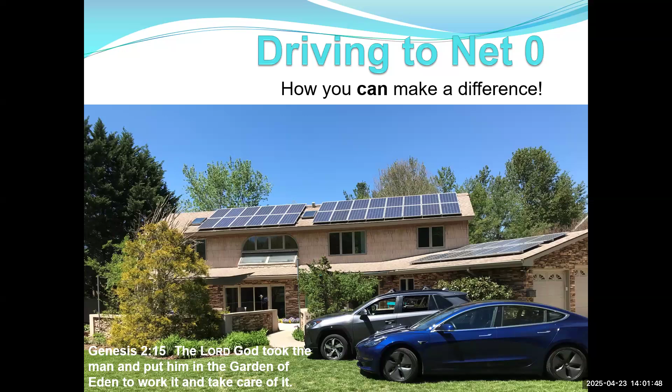My name's Dave Harivnak. I'm a PE who retired after 34 years at Eastman Chemical Company. And I've always been interested in sustainability. My first home was a passive solar earth-bermed home built into a hillside. And in 2008, when gasoline prices hit $4 a gallon for the first time, I turned my Chevy Avalanche into a plug-in hybrid, which led to a new project where I converted a Jeep for a friend into all electric drive.

And this is where I really learned about the possibility of lithium ion batteries and the power of electric drive. Our latest house is well insulated, passive solar, and we've got rooftop solar that powers not only the house, but the cars as well.

I was a scout leader for more than 20 years as my children were growing up. And for the past 14 years, I've been a mentor with the FIRST Robotics program. And so proud of the team this year that won a regional, finished second in a second regional, and went to Worlds and even competed in the finals.

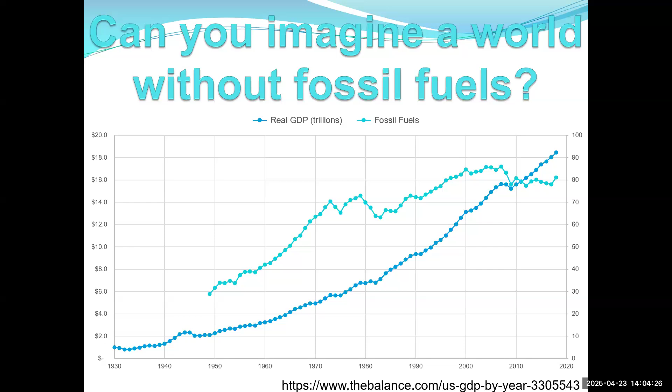You know, serf, cook me dinner. Serf, get me a warm bath. Serf, take me to work. Bring me home. And of course, we aren't using people for that, but we're using fossil fuels to multiply all of our efforts and to make our lives far more comfortable. And when you think about it, if you're a middle-class American, you're probably living a lifestyle that kings and queens could only dream about just 200 years ago.

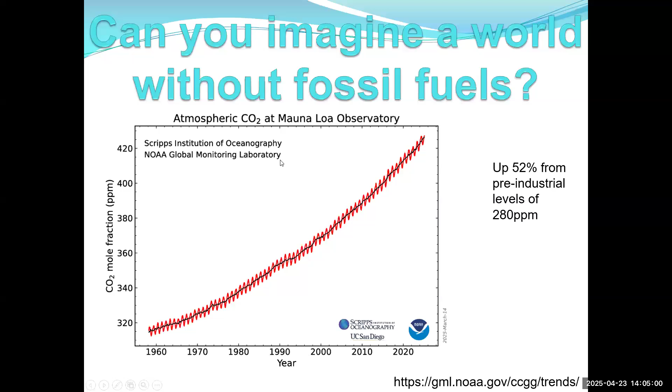But as we look throughout the world, there's no such thing as a wealthy, rich, well-to-do country that uses a low amount of energy. We all use energy. But we've also come to find that that use of energy is causing a problem, as burning all that carbon that's been stored buried inside the earth is causing CO2 to rise, and that CO2 is trapping heat absorbing gases, causing our planet to warm and causing storms to be more challenging.

So scientists have said we need to reduce emissions at least 80% to avoid the worst effects of climate change. And some of them are now on record for saying we have to cut 100%. So if we could take a little poll here or put into the chat, how many of you envision a life like this if we had to live without fossil fuels?

Hello? Just put into the chat if this is how you envision a world without fossil fuels. Okay, good. All right.

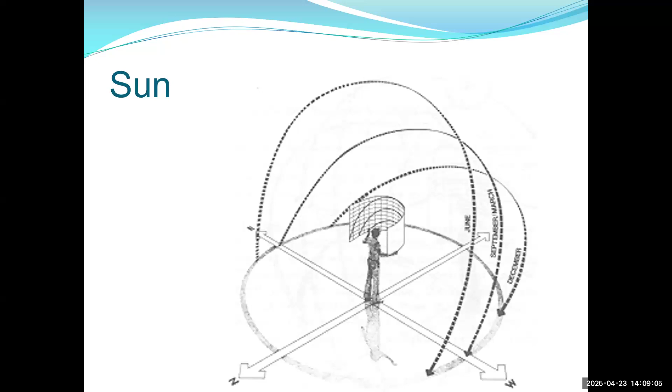lower in the horizon. And so I used this as I designed my house so that most of the windows are on the south side and the overhangs are such that the winter sun can penetrate deeply into the home, but the summer sun is basically shaded by the overhangs so that my windows are basically shaded all summer long.

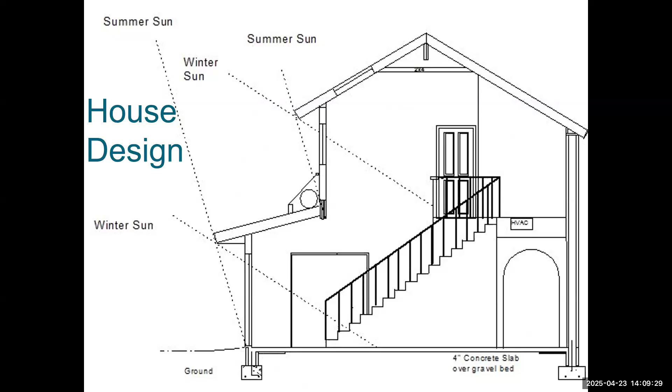And I also did this from a top view of the house as well, with the layout of the house and the garage, so that in the summertime when the sun rises, my patio's in the shade, and likewise late in the evening when the sun's behind the house, our patio is in the shade. But in the wintertime, from sunrise to sunset, we're in the sun.

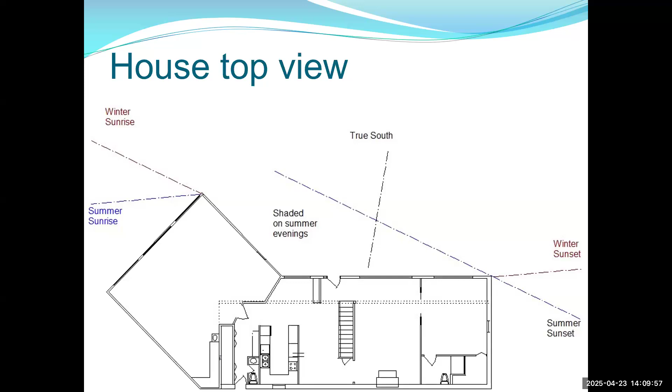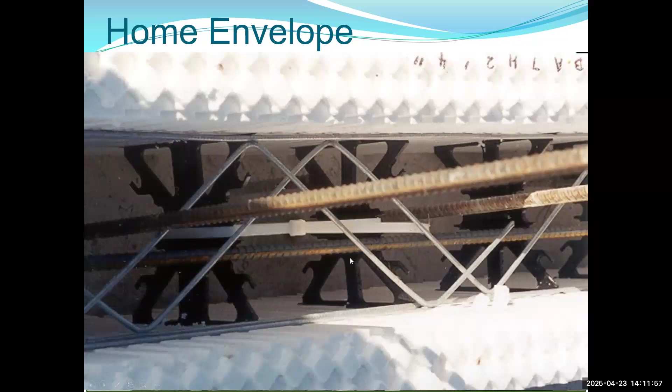I tried to build a very energy efficient envelope using insulated concrete forms. These are almost like big Lego blocks that are 4 foot wide, 16 inches tall, and a foot thick. And they actually have nubs on the top and on the bottom so that they snap together very similar to Legos. And then as you're building the wall, you throw in horizontal and vertical rebar. And then once you get that wall completed, you fill that wall with solid concrete.

Basically, this makes for a very well-insulated wall, about an R40 if you're comparing it to a wood and fiberglass insulation wall, and very airtight. Virtually no air is going to be leaking around through the concrete and through that styrofoam.

For a roofing system, we used structural insulated panels, sometimes called SIPs. Imagine a sheet of plywood that's 4 foot wide and 15 foot long, laminated to 8 inches of styrofoam, laminated to another sheet of plywood that is 4 foot wide and 15 foot long. And this again makes for a very well insulated roof with no air gaps or air leakage.

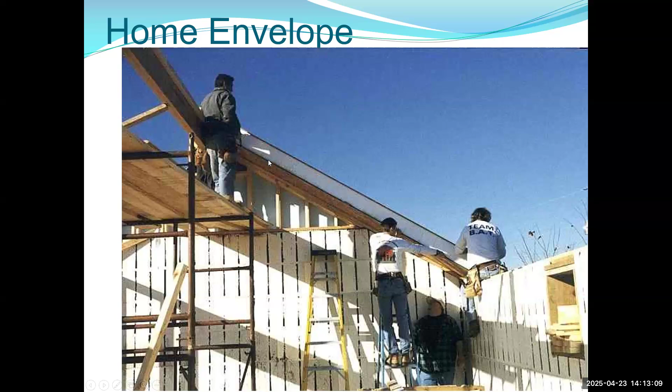And to give you an idea of what this really looks like, on a winter day when we had some light snow and temperatures were right around freezing, as you can see, the roof surface is very uniform. You don't see any of that snow melting off. But my poor neighbor across the street, you can see a lot of bare areas on his roof where the heat from the house is escaping up and melting the snow off the roof. And anytime you see holes on your roof like that, you're basically sending money out through the roof of your house.

So as a good engineer, I tried to do an analysis comparing our house to other houses and found out that our energy savings were about 60% compared to friends' and neighbors' homes. So the home was doing a good job. So imagine, to my dismay, back in 2009, when I actually sat down and calculated my own personal carbon footprint, I wasn't below average. I wasn't even average. We were actually above average, with our family emitting about 22 tons a year.

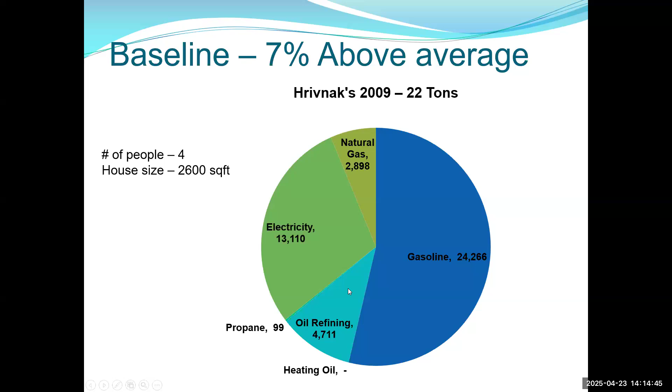And when I did a pie analysis of that, I found out our biggest offender was our gasoline use. So the first thing I did was dig into electric vehicles. And here you can see the 22 tons of emissions that we were putting out each and every year back in the early 2000s. For transportation, back in 2009, we were driving about 25,000 miles a year.

The Chevy Avalanche, which is kind of similar to like a Chevy Silverado, a Ford F-250 crew cab, was getting 16.4 miles per gallon. We used that for all the trips for the family and for scouts. And that was responsible for about 10 tons of emissions, with another 4.5 tons from the slightly more efficient Geo Prizm, kind of like a Chevy Nova or a Toyota Corolla, that back in the day was getting 28.5 miles a gallon.

And when I sat down and figured out the fuel costs, we were spending about $3,600 a year to keep those cars running. And I truly believe electric cars are significantly better. The first EV I ended up getting was a used Tesla Roadster. I got it in 2010, telling my wife that it was the most energy efficient car I was able to find.

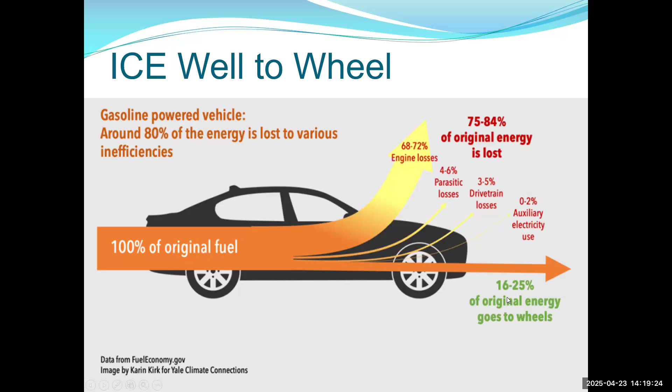And the reason why electric vehicles are so much more efficient: when you look at a gasoline-powered car, about 80% of that energy in the gasoline in the tank is lost. Most of that to heat losses out the exhaust, through the radiator, through the engine. You've got some parasitic and drivetrain losses, but only about 20% of that energy in the tank actually goes to moving your car forward, where an EV turns that on its end, where over 80% of that energy in the battery goes to moving the car forward. And you also have this nice energy recapture from regenerative braking. And I'll talk about that in a little bit longer.

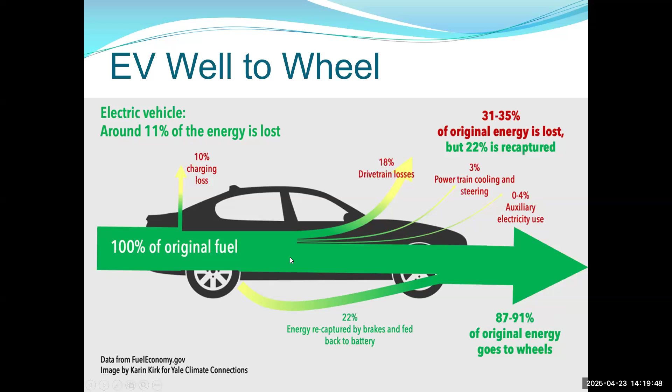I truly believe electric vehicles are cheaper in the long term, as they have far fewer moving parts. That Roadster has only 17 moving parts in the entire drivetrain. There's no exhaust or catalytic converter. Brakes last longer due to regeneration. Basically, you take your foot off the accelerator and your motor turns into a generator, slowing your car down and putting additional charge into your battery.

Around here, one of our highest mountains, Roan Mountain, I can be at the top of Roan Mountain and I can add basically about 17 miles and never touch the friction brakes coming down that mountain. And there's not a gas car around that's going to add, let's say, a half gallon of gas on your way down a mountain. Again, there's no oil changes, no pressurized cooling, no transmission.

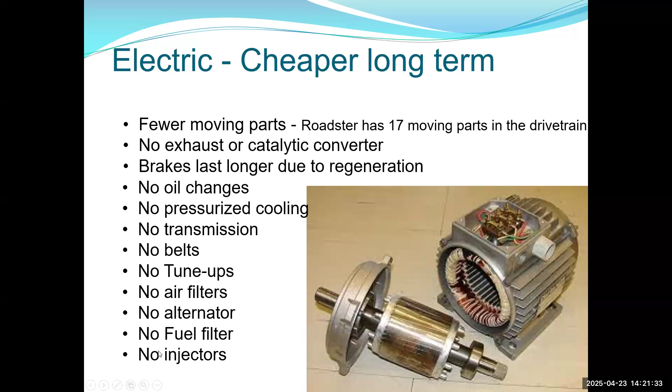There's no transmission. Basically, the vast majority of EVs are a single speed car, and even reverse, they just reverse the electric field. So you don't need any gearing to go in reverse. There's no belts, no tune-ups, no air filters, alternators, fuel filters, or injectors. And so I have found, after 15 years of driving an EV now, that they truly are lower cost to maintain.

So by just changing our transportation, we were able to drop our emissions from 7% above average to 40% below average. We're actually driving more miles right now, but we're emitting far less emissions. Tesla Model 3 is rated at 128 miles a gallon, and that's our main trip car. And we got a RAV4 Prime, which is a plug-in hybrid that I'll talk on here in just a minute. Oh, and the nice thing after going through this, we're saving about $2,550 in fuel savings. Yes, we still have to pay for electricity, but electricity is far cheaper for us than buying gasoline.

The Toyota RAV4 Prime, quote, the wife's car, is fully electric for about 42 miles. And then after 40 miles, it'll switch into hybrid mode, as I call it, as it's got a range extending gas motor. And the main reason we have this is our one big emission that I haven't figured out to completely eliminate is we love camping and touring, especially national parks and national forests here in the United States and Canada. And here we are out in Idaho in a national forest in the Sawtooth Mountains. And most of the national parks and national forests don't have any electricity. So having that ability to use gas gives us that freedom.

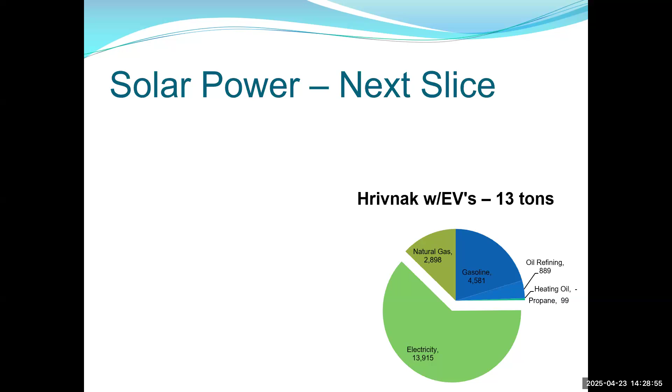But anyways, now with the electric vehicles, we're down to 13 tons of emissions. I redid my personal pie chart, and now you see electricity is the biggest opportunity for improvement. So I decided to look into solar.

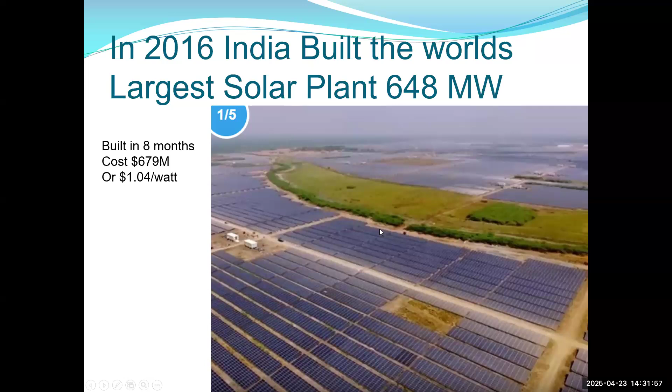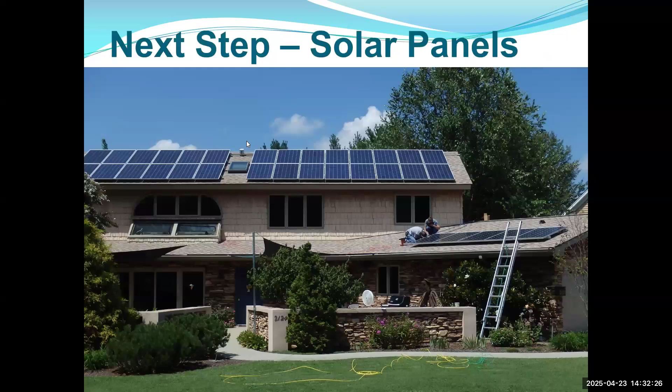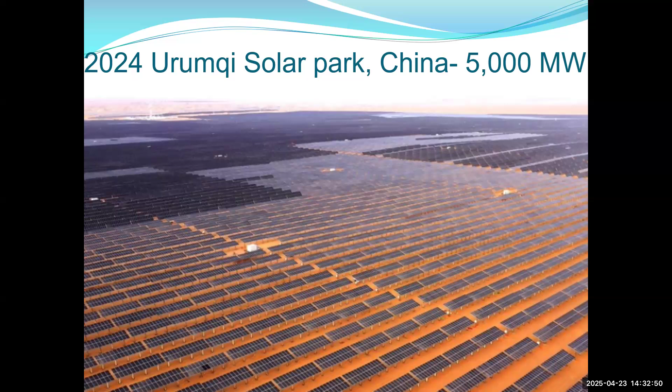Then in 2018-19, India built a 2 gigawatt solar system, which was broken again in India in 2021 with a 2.2 gigawatt system. And now last year, China just unleashed a 5,000 megawatt solar park in the deserts of China.

So we added solar to our house. As somebody noted, we put the solar in some 12 years ago. And 12 years ago, solar was just getting started, and Tennessee had virtually no codes that applied to solar. So if we were putting the solar in today, we'd have to go with smaller panels or put them in landscape mode, because we couldn't go all the way to the roof peak here. We've got to leave 18 inches now, and we've got to leave a full 3-foot walkway on the side.

We are grid tied. Our local utility allows net metering. So basically, on a nice sunny day like we're having right now, our meter's essentially running backwards, and we're putting power onto the grid that we get to use later on. Again, this is an older system. Today, if this was being put in, we would have 1 inverter rather than 2. I've got a 3 kilowatt and a 4 kilowatt inverter.

And then because I've got 2 inverters, we have to come together into a combiner box before we go into our electric panel. So on a newer system, we would probably replace this with a single 7.6 kilowatt inverter, and then we could get away without the combiner box as well.

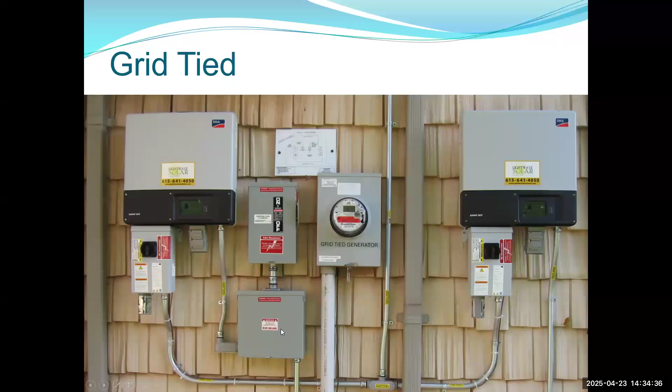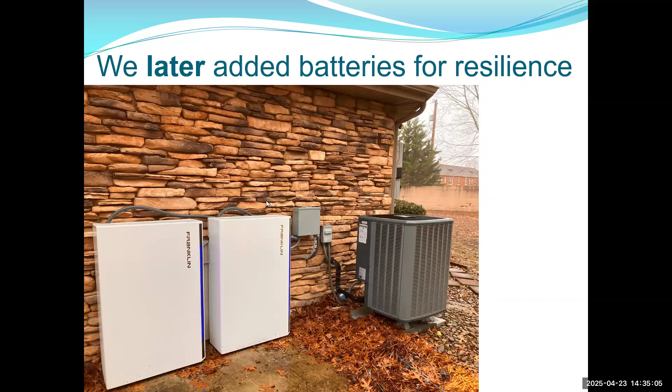We did later add batteries. Basically, I am selling and installing solar systems, or mostly doing the engineering for the solar systems. And so I really wanted to have some practical experience with batteries, which came in handy during Hurricane Helene, where my son never even noticed we lost power, and the house just kept on trucking.

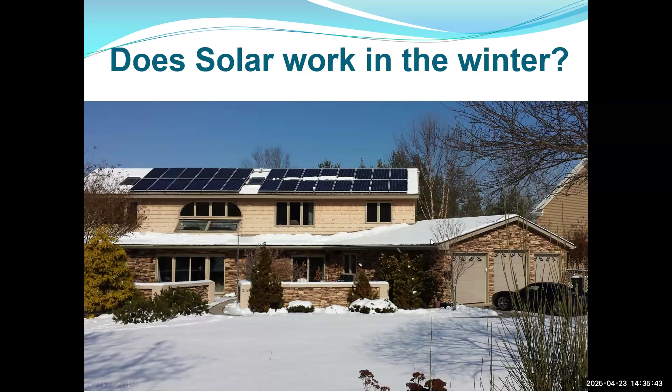People ask if solar works in the wintertime, and the short answer is yes. You do have less generation, mainly due to the lower sun angle, or shorter days. But even when it snows, because of the dark surface and the sloped surface, the last place snow will lay is on a solar panel, and it's the first place it's going to melt off of. Oh, and for this picture here, I hadn't added the garage panels. That was a little bit later of an expansion.

As I said, personally, we use more electricity in the winter than we do in the spring and fall. And we have a little bit of a summertime peak here with air conditioning, but I will build somewhere between 1,500 and 2,200 kilowatt hours of credits during the spring, fall, and summer. And then I can use that to cover the shortfall and power me through the winter.

Let's see, it looks like I got a question here.

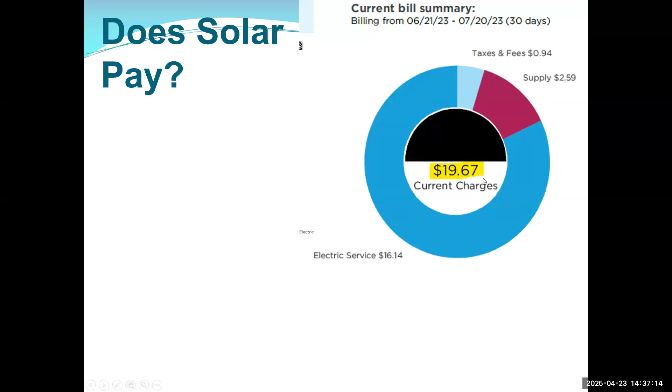But here's a picture of my electric bill when people ask me, does solar pay? Yes, I did pay 21,000. So that's not an insignificant price to pay for solar. And that is with a tax credit, fortunately. It would have been about 30,000 without the tax credit. But as you zoom in, our electric bill, for the most part, is a very consistent $20 a month.

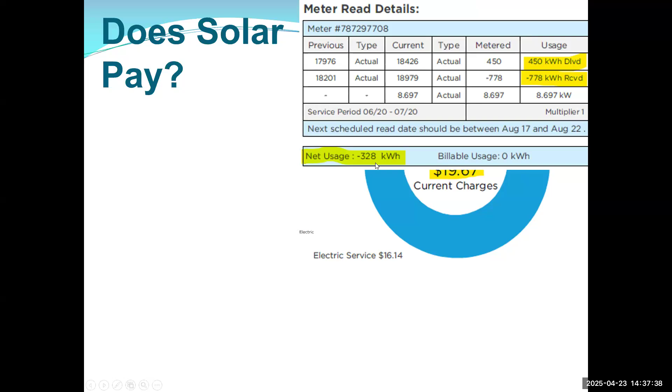And if you look into the detail that the power company gives me, like for this particular month, I used 450 kilowatt hours of energy from the grid, but I gave the grid 778. So for a net usage of negative 328 kilowatt hours that month that I sent to them. And if you look at my history, I used 0 in July, 0 in June, and 0 the previous year. And the total usage for the past 12 months was 0.

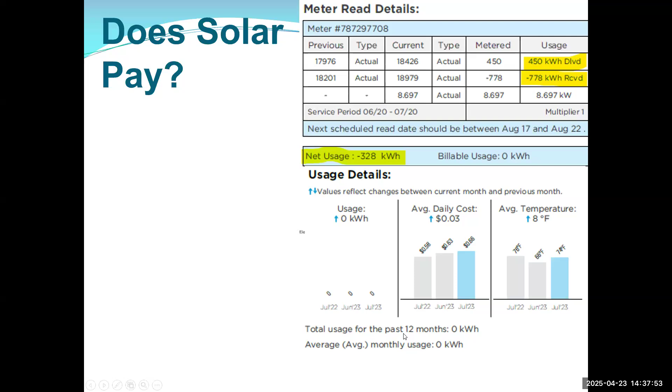As a matter of fact, there's been several years where we've generated more power than we've used. And that basically just ends up being a donation to the power company. And remember, that includes about 1,400 miles of driving in our EVs each month. So again, solar wasn't free, but how much do you pay for your electric bill and 4 tanks of gas?

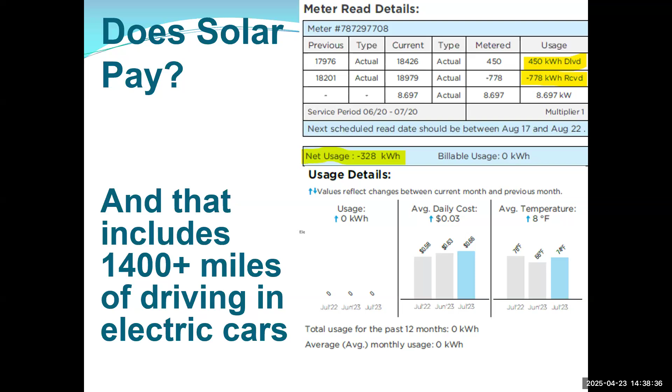And for us, it was about year 7 is when we broke even. And then we were able to now have 5 years of basically no cost power and energy. So with solar production, we've now gone from 7 or 8% above average to 70% below average, and another 6 tons of emissions were eliminated. All of a sudden, I began to realize that that 80% goal we were trying to achieve was not only achievable, but in many ways desirable.

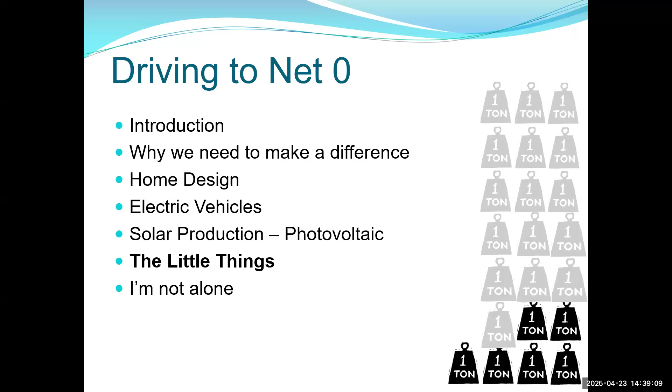So let's not forget about the many little things that we did over the years as well. When it comes to appliances, we used Energy Star appliances. They may cost a little bit more up front, but I'm looking at the long-term cost: not only the cost of that appliance, but how much energy it'll use. This is a handy little meter if you want to measure your own usage. It's a Kill A Watt meter, and you can plug it in to see how much energy your TV's using, lights are using.

A couple years ago, my wife got some LED Christmas lights, and I plugged in a string of our old Christmas lights, and it was 58 watts. The LED bulbs were 7 watts. It's kind of like, okay, let's get rid of all those old Christmas lights. And of course, there's been an incredible revolution in LED lighting.

Again, trying to get to that total cost of ownership, which bulb is the cheapest? Yes, an incandescent bulb is typically cheaper than a compact fluorescent or an LED light bulb. But when you realize that LED bulb typically would last far longer than an incandescent, and more importantly, that LED bulb at about 7.5 watts of power versus 60 watts in the incandescent, if you figure out the electricity cost to run it, you all of a sudden see that cheap incandescent light bulb is actually quite expensive.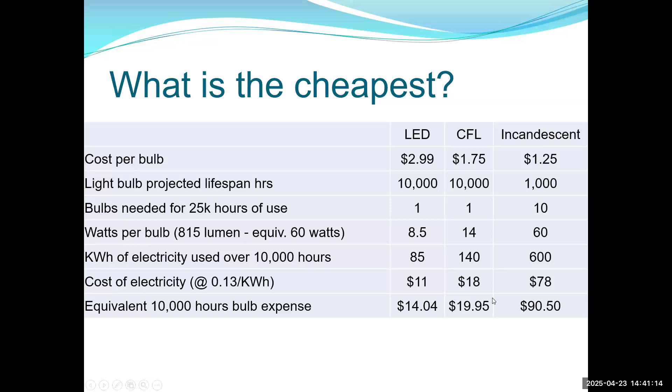And here's another use of lighting. Let's assume that the average house has got about 30 light bulbs, and they're on about 4 hours a day. By swapping out to an LED, you'd save 51 watts each. So that would be about 184 kilowatt hours a month. That would save you about $24 if you have average power rates, or that's enough power savings to drive an EV 612 miles. No panel upgrades, no electrical upgrades, basically just changing out your light bulbs, and then you're able to partially power a second car for many households. Another neat thing we found is a heat pump water heater.

It's a standard water heater from here on down, and then it's got a little heat pump that sits on top. They're about double the price of a regular electric water heater, so figure on spending about $800 more. Fortunately, there is an energy tax credit that takes some of that bite out. But what drove me to it is the annual energy costs are 1/4 that of an electric water heater.

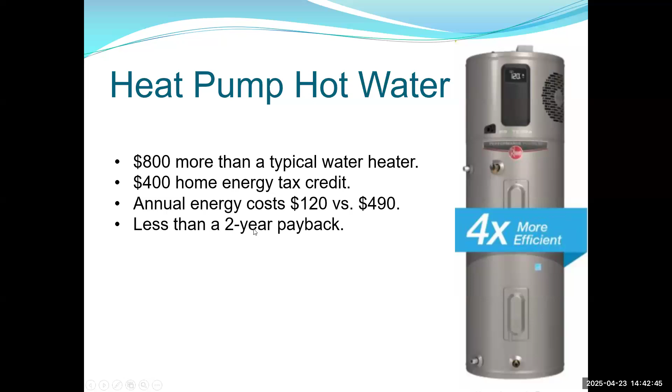So in our particular case, after some 19 or 20 years of use, we replaced our water heater. I was figuring on a 2-year payback to cover that cost of the water heater. And again, that's enough power to drive an EV some 10,000 miles a year. So that could be your main car all of a sudden, barring a few trips.

We also upgraded virtually all of our yard tools. We got a battery-powered lawnmower, battery-powered blower, battery-powered chainsaw, and weed eater. And now we don't have to worry about putting stabilizer in the gas and having to get them tuned up every spring. So overall, we've now managed to go from about 7% above average to 81% below average.

Over 18 tons of CO2 are being averted by us each and every year, and we're saving around $3,400 a year in gasoline and electricity savings. And so not only did we find out that 80% was possible, we started to realize that in many ways, it's a better lifestyle.

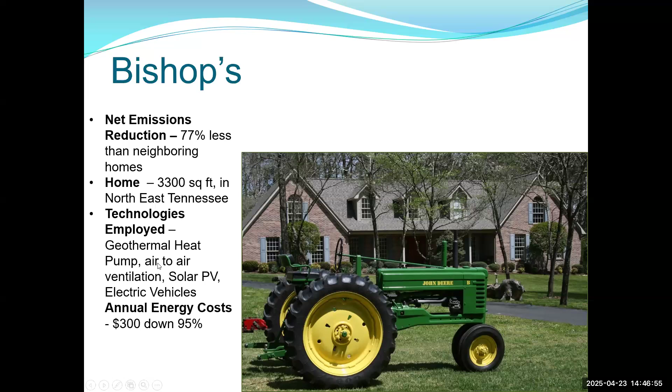The wife has a 2015 Tesla Model S that they still use for their trips. This is a Honda Insight that Mark had converted to all-electric drive, and he still has the Insight, but he also purchased a Tesla Model 3. That's his EV bike, and that's his electric lawnmower.

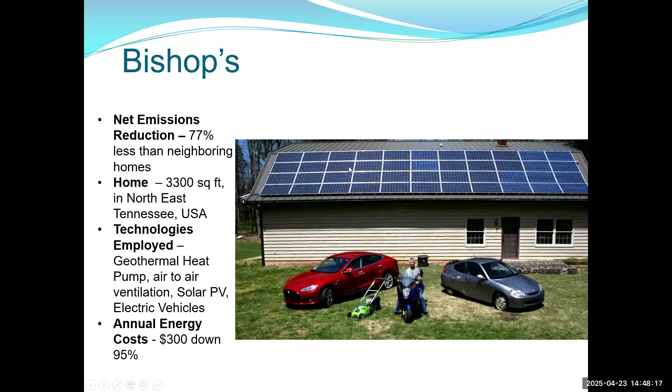At the time of the book, their annual energy costs were about $300, or about 5% that of their neighbors. And again, since he expanded his solar system up here, his annual energy costs are even below that. Matter of fact, I think he's positive because he's under an older TVA program where they were paying him for the power he produces. They no longer have that in TVA land, but he actually makes money on his solar system.

Kind of like my house, they have the passive solar design so that the sun comes in deeply during the winter, but in the summer when the sun is higher, they will not get as much sun into the house. And built into the hillside with dirt on the north side of the house helps keep that house comfortable even in the wintertime, because now instead of 10-degree outside air, you've got 50-degree tempered earth.

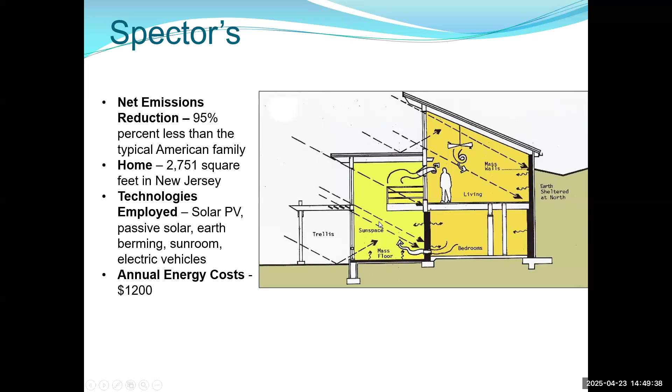And then in the wintertime, in the fall, late fall, early spring, this room is comfortable again to be out in. And even in the middle of winter, it may be 50 degrees in here, where the outside temperature could be 20 or 10 degrees. So again, it helps moderate the house.

Their annual energy costs are about $1,200 a year, down about 75%. Different utilities and different prices of gasoline do change. They use a Chevy Bolt that's got a good 240 miles of range that I believe they're still using today.

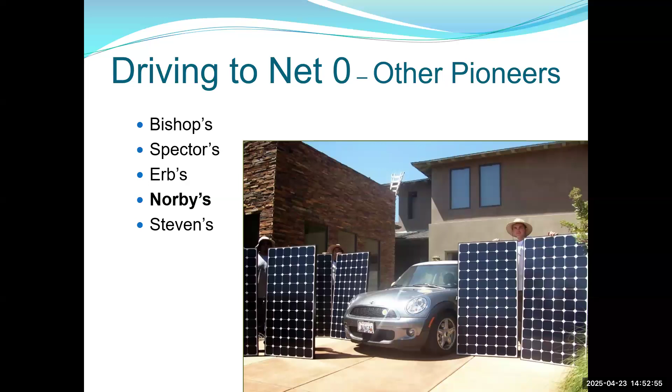Our fourth case study takes us out to California to Peter Norby. He's an engineer who built a passive solar house, and he really likes electric BMWs. He went through a real detailed analysis. Their net emissions reduction were 120% less than the typical American family. And I'll show you the trick he used to go negative there.

But he did an analysis of 2 gasoline cars and home fuel versus 2 BMW i3s and powering his house with solar. So if you have 2 gas cars at 20,000 miles a year at 26 miles per gallon, he basically figures that you're going to spend over a 25-year period $140,000 worth of fuel.

Likewise, with 2 BMW i3s, these are all electric cars, smaller efficient ones. A 4 kilowatt solar system would cost about $12,000 one time. So the first year cost is $12,000, but the 25-year cost is also $12,000, saving a significant amount of fuel costs over the 25-year life he's using for the solar system. And by the way, solar systems should last well past 30 years.

For his home, if he were to use power from the grid at 25 cents per kilowatt hour, that would be about $2,000 a year. Or to generate that same 8,000 kilowatt hours, he could do that with a 6 kilowatt solar system. I'm generous. They get a little bit more sun in California than we do here in Tennessee.